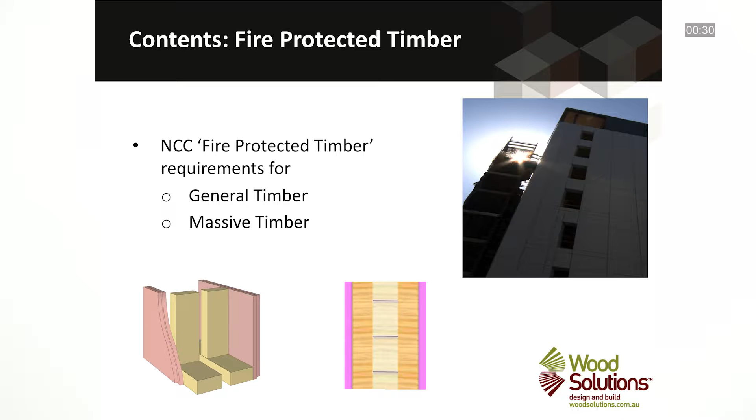In this presentation, we will examine the NCC provisions for fire-protected timber for both the general requirements covering lightweight timber systems and also massive timber systems. Let's start with the general requirements.

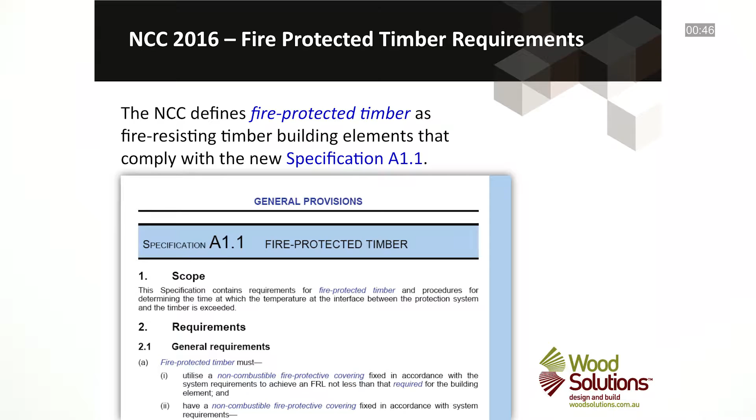The NCC defines fire-protected timber as fire-resisting timber building elements that comply with the new specification A1.1. Specification A1.1, clause 2.1, applies the following general requirements to fire-protected timber.

In summary, the building element must be protected to achieve the required fire resistance level, or FRL, and have a non-combustible fire protective covering applied to the timber, which achieves a resistance to the incipient spread of fire of not less than 45 minutes when tested in accordance with AS 1530.4.

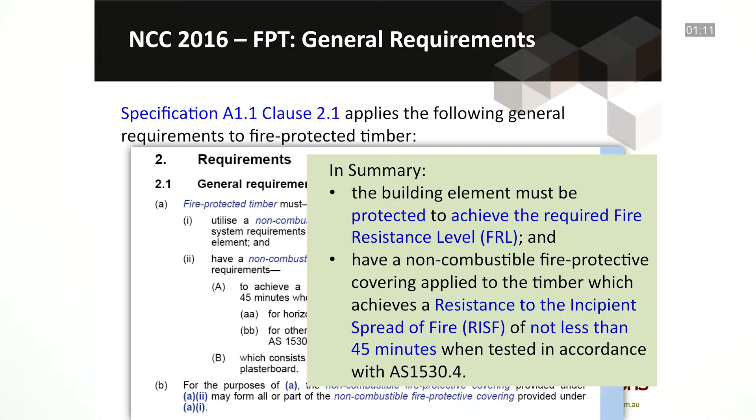In practice, this means 2 layers of 13mm fire-grade plasterboard. This configuration meets the non-combustibility requirement and also achieves the required FRL of the element, and the equivalent performance to an RISF of 45 minutes.

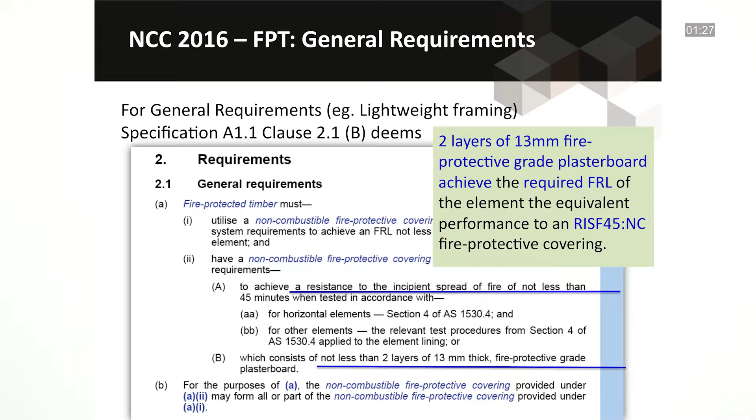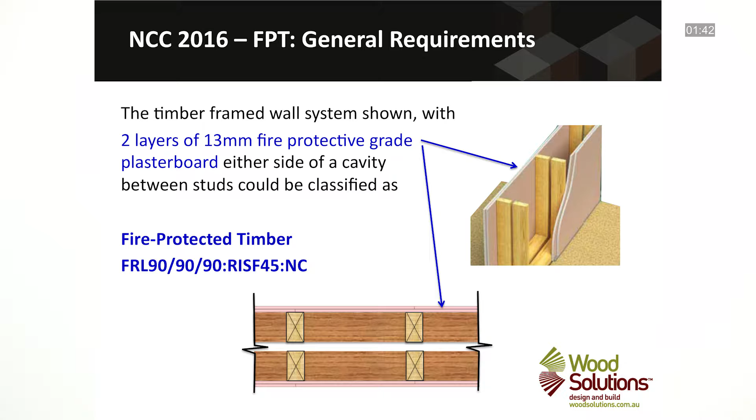So by example, the discontinuous timber frame wall system shown here, with 2 layers of 13mm fire protective grade plasterboard either side of a cavity between studs, could be classified as fire protected timber FRL 90-90-90, RISF 45, non-combustible.

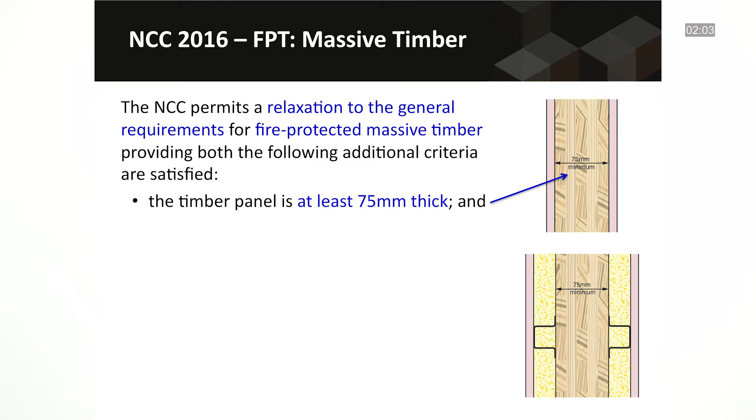With massive timber systems, the NCC provides some concessions. The NCC permits a relaxation to the general requirements for fire-protected massive timber, providing both the following additional criteria are satisfied. The timber panel is at least 75mm thick, and any cavity between the surface of the timber and the fire-protective covering or between timber members is filled with non-combustible materials.

It should be noted that this 75mm dimension relates to the minimum dimension of the dressed, finished timber member. In most instances, massive timber elements will have minimum dimensions much greater than 75mm to meet the structural adequacy and integrity criteria of AS 1530.4.

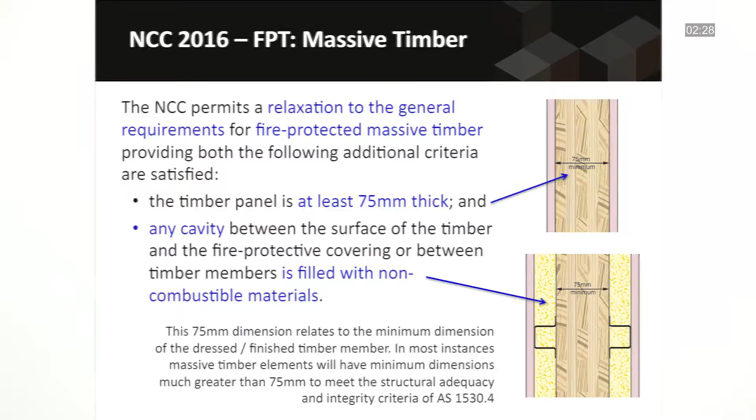The rationale for this concession for massive timber is that subject to maintaining the required FRL, the consequences of ignition of the timber structural members are significantly reduced because timber with a large cross-section can achieve high fire resistance levels due to the formation of a char layer.

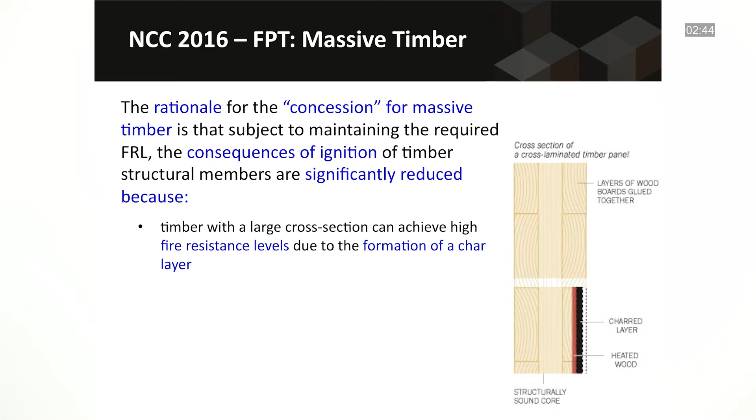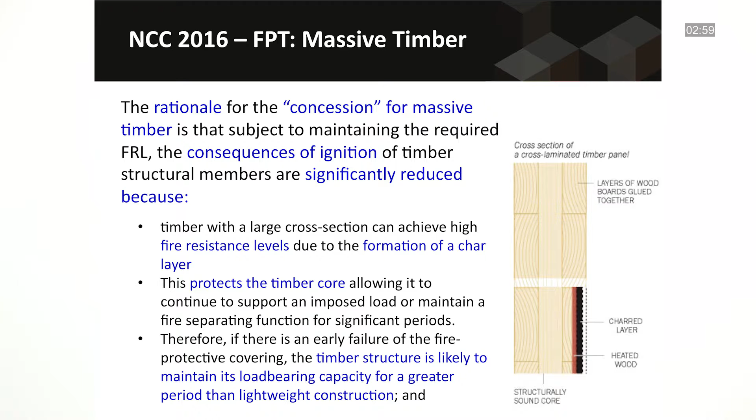This protects the timber core, allowing it to continue to support an imposed load or maintain a fire-separating function for significant periods. Therefore, if there is an early failure of the fire-protective covering, the timber structure is likely to maintain its load-bearing capacity for a greater period than lightweight construction.

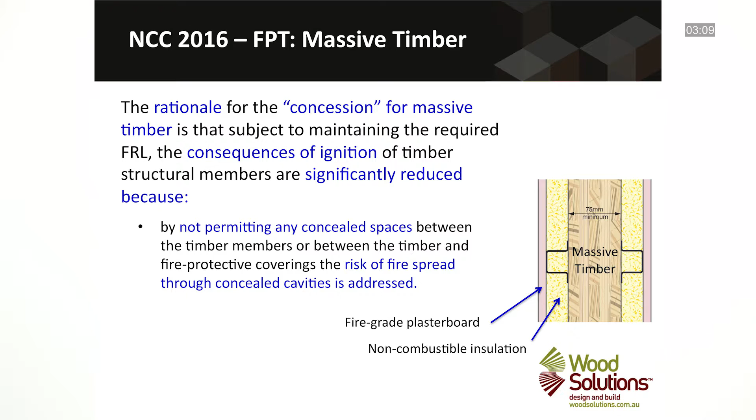And, by not permitting any concealed spaces between the timber members or between the timber and fire-protective coverings, the risk of fire spread through the concealed cavity is addressed.

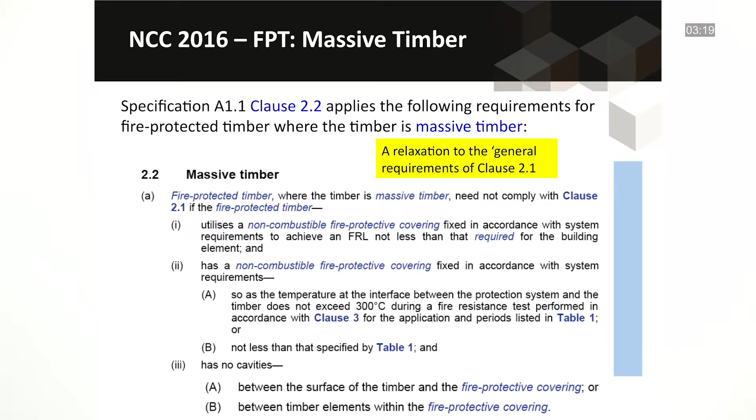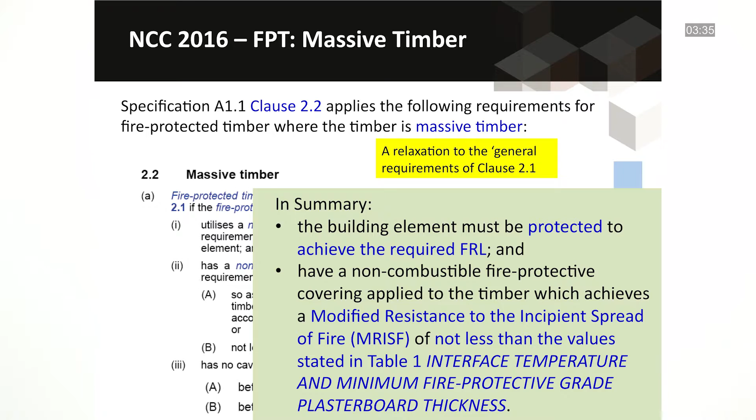Specification A1.1, clause 2.2, applies the following requirements for fire-protected timber where massive timber is used. In summary, the building element must be protected to achieve the required FRL and have a non-combustible fire-protective covering applied to the timber, which achieves a modified resistance to the incipient spread of fire of not less than the values stated in Table 1, interface, temperature and minimum fire-protective grade plasterboard thickness.

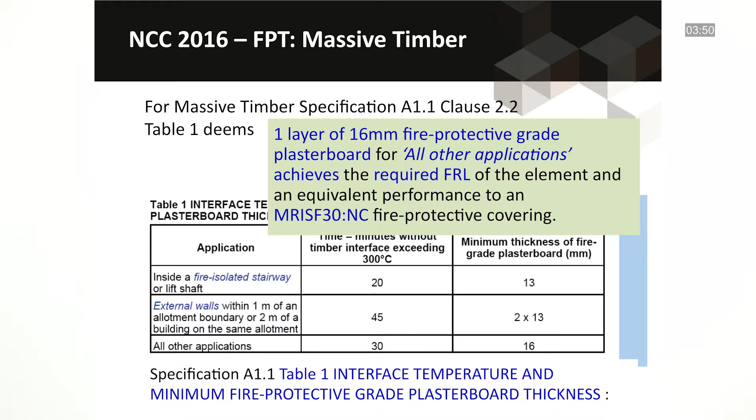For massive timber, specification A1.1, clause 2.2, Table 1, deems 1 layer of 16mm fire protective grade plasterboard for all other applications achieves the required FRL of the element and an equivalent performance to an MRISF of 30 minutes.

So by example, the massive timber wall system shown here with 1 layer of 16mm fire protective grade plasterboard either fixed directly to the massive timber element or including non-combustible insulation could be classified as fire protected timber FRL 90-90-90, MRISF 30, non-combustible.

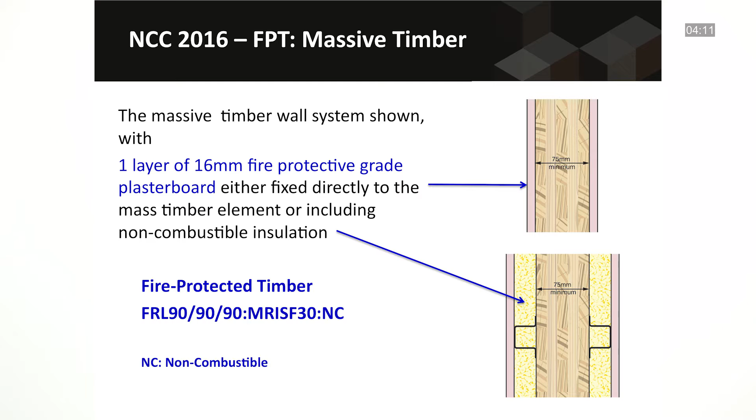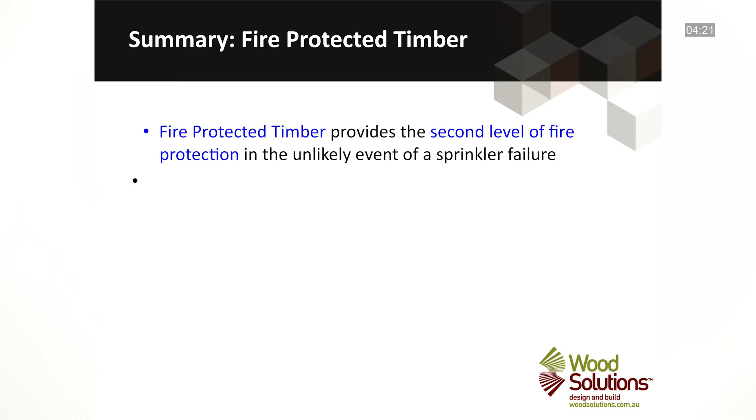So in summary, fire-protected timber provides the second level of fire protection in the unlikely event of a sprinkler failure. The general requirements for lightweight timber wall systems specify that 2 layers of 13mm fire-protective grade plasterboard achieves the required FRL and an RISF of 45 minutes.

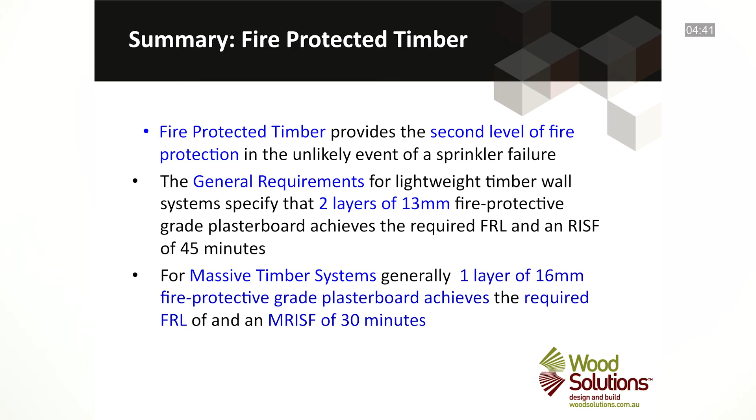For massive timber systems, generally 1 layer of 16mm fire-protective grade plasterboard achieves the required FRL and an MRISF of 30 minutes. For further information on wood and wood products, visit woodsolutions.com.au, the website for wood.